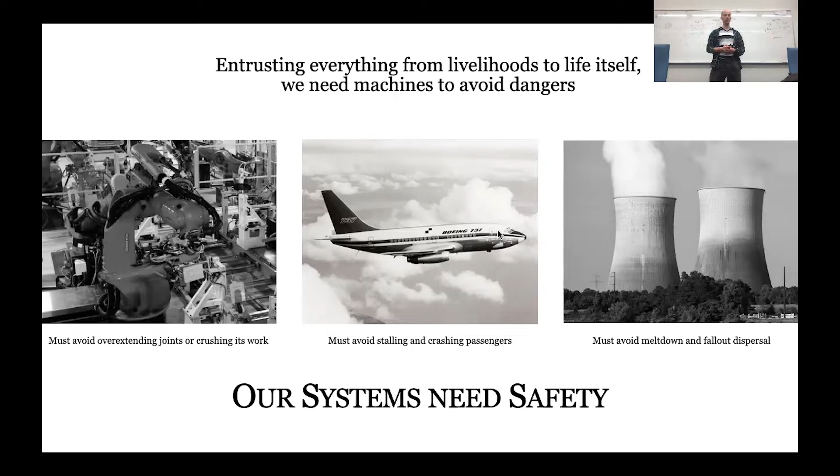These critical quantities are things that we track dynamically as dynamic states and form the foundation of control theory. With advances in safe control, like the work that we do here in Cory's third floor, we're able to robustly prove that our systems can remain safe despite perturbations or misspecification within a certain family.

Just to give one concrete example that will turn up often in this talk, we can analyze which states can reach a certain dangerous keep-out state. In fact, we are checking to see which states are upstream of that danger. We literally use the same partial differential equations for fluid flow and get viscosity solutions just the same to analyze which states are at risk of careening into disaster.

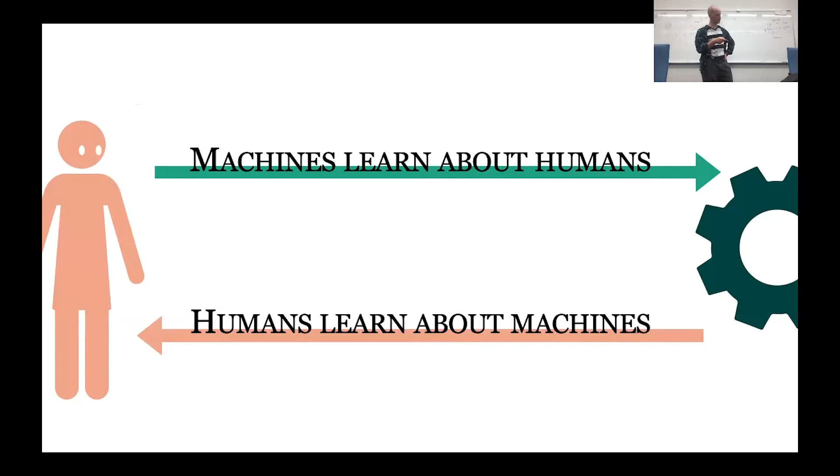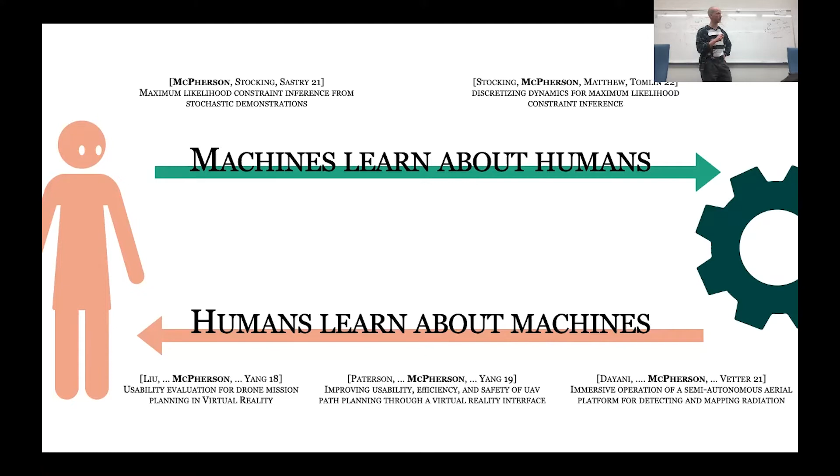I've had the pleasure of getting to research and publish papers on both of these arrows. But the research I would like to share with you today actually occupies a space between, where it works with both the green arrow and the pink arrow by first learning a model of human perception. We're able to use that model to generate behavior that helps them perceive and learn correctly, thereby completing a full loop.

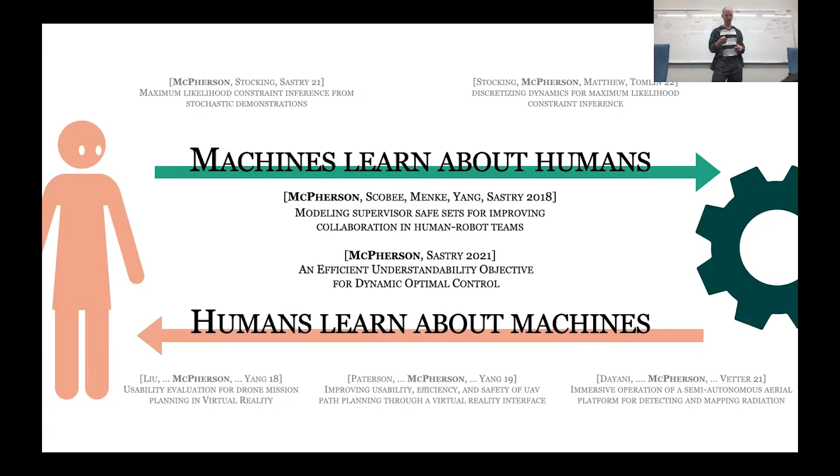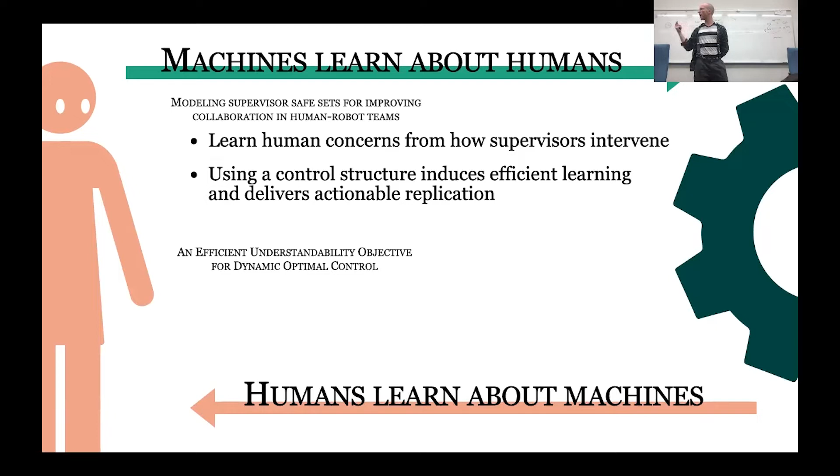So today's talk is going to be structured into two parts corresponding to these two projects. In the first, we'll emphasize the green arrow, using machine learning to model human supervisory concerns, then do a very basic way of adapting robot controls to conform to the supervisor's concerns, like designing a glove to fit a hand. In the second part, we'll focus more on the pink arrow, preferring a simple model of how humans perceive and judge, but emphasizing how we can proactively optimize controls to communicate safety.

So let's dive right in. To set the scene, it's pertinent to know that there have been great strides in not just machine learning, but particularly learning from human demonstrations. When a human acts and shows how to move through a scene, we can learn from their expertise.

For us safety folks, we can do something similar to learn how experts move around dangers and how humans consider risks, including some of my own research, which you can read about in the earlier chapters of my thesis that are not being presented today. But all of these methods work from how experts themselves move through a scene in order to avoid safety issues.

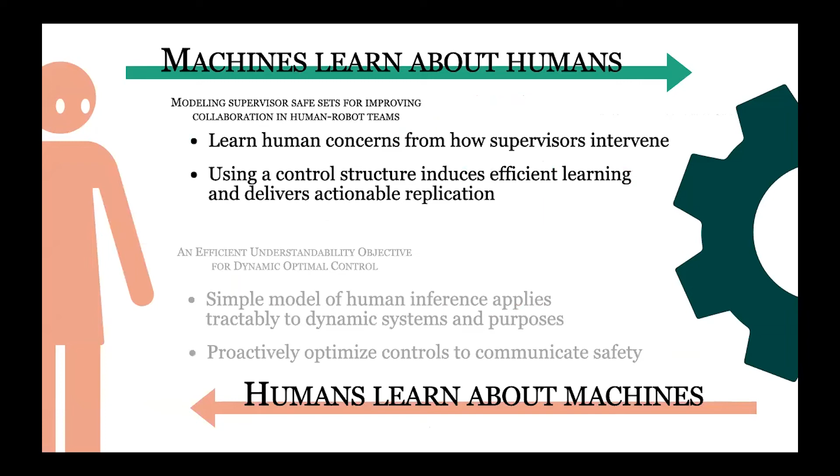So in this section, we were able to learn human concerns, particularly how they forecast danger. We used reachable sets as mathematical structure, as an inductive bias, to induce efficient learning, and deliver very concrete, actionable advice on just how to replicate human alarm and human concern.

Each of these points also opens up potentials for future research that I'm quite excited about. The first is that the data efficiency means we could learn a safe set for each individual human. But it's worth asking, is it necessary to learn a safe set for each human, or is there a one-size-fits-all of supervisor concerns?

My conjecture is that people with more anxiety who want the vehicles to turn earlier, or people with attention deficits, might see effects where when the number of robots drives up, the ability to intervene drops. So it's worth asking how neurodiversity plays into human-robot collaboration, and how we can help our systems work for all people or for a variety of neurotypes.

This second point is more of a philosophical exhortation, which is that this research, by using tools from formal verification, is not the first of its kind, but it's another example of how we can model human intelligence with something other than the econometrics maximum profit model, which is so much in vogue for a lot of artificial intelligence type stuff.

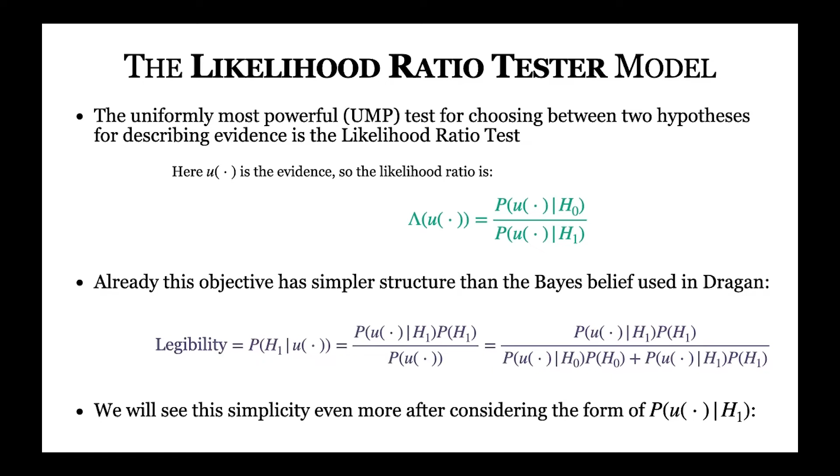this distribution of U's given intents. So let's dive into that. This econometrics derived model, the random utility model, distributes the probability of chosen control trajectories based off of how costly they are. The more costly they are, the more unlikely. And then you have to normalize this. And if you just abstract that away into the Z, this seems not too bad.

You have to integrate this exponential over all possible controls, which for continuous time is literally an infinite dimensional space. That sum will be a bit difficult to pull off.

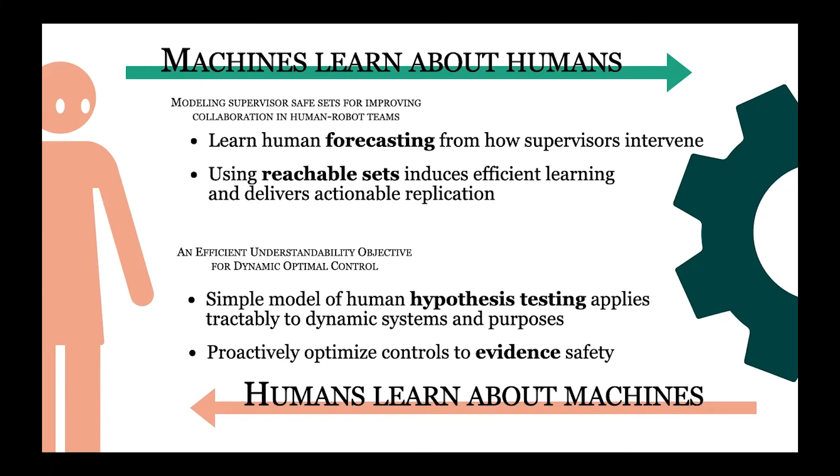Take a step back and look at the bigger picture. We now have two different illustrations of how machines can first learn about humans through a simple cognitive model, and then use that understanding to help humans learn about machines. I'd like to conjecture that once humans understand more about machine safety and unsafety, they can improve the data they're providing to the machines. And then we can have humans help machines learn about humans.

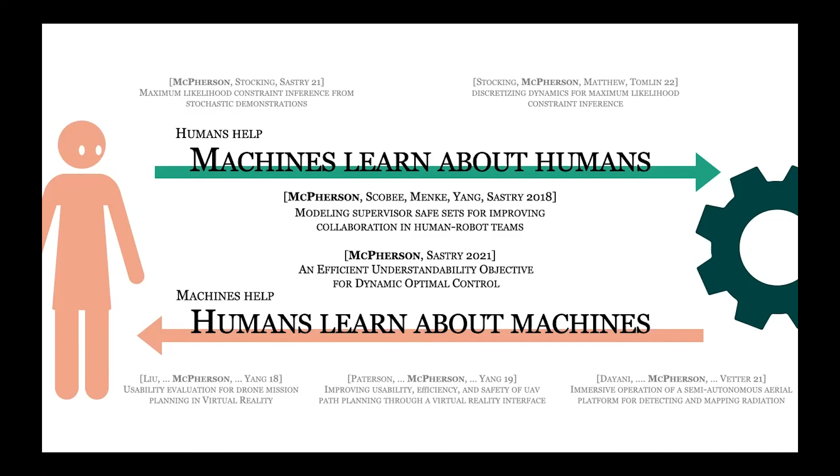This forms a virtuous cycle where more understanding of humans provides more understanding of machines, provides more understanding of humans, ad infinitum. In control theory, we call this a positive feedback loop, which will blow up to infinity. For states we want to keep stable, that's bad. But for mutual learning, which is a strict positive, I don't mind if that increases to infinity. So let's create a feedback loop of human learning and mutual understanding.

This mutual understanding is not only going to be vital to the people behind the wheel who have to save otherwise opaque systems from certain death, but it will also be handy to all humans who have to collaborate side by side with these machines.

Continuing with the road example, we see that in our current rollout of self-driving cars as they hit the streets, most accidents are actually caused by what should be safe behaviors—not charging through stoplights, but instead hitting the brakes. These safe stops are too opaque to be safe. It causes other road users to rear end or sideswipe our machines.

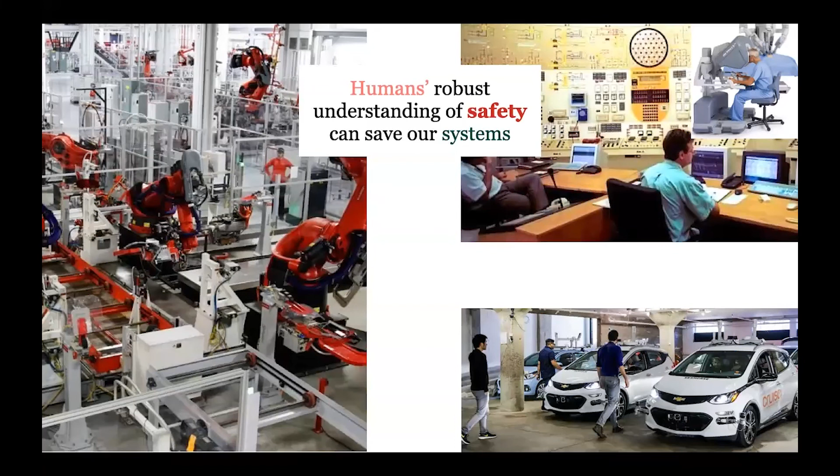So we see that transparent safety is vital not only to safety supervisors, as we've mainly been concerned with, but also to the entire populace and society of humans who have to collaborate with our machines. As our machines are becoming increasingly not just reportees to humans, but side-by-side collaborators in our streets, in our factories, and even in our hospitals.

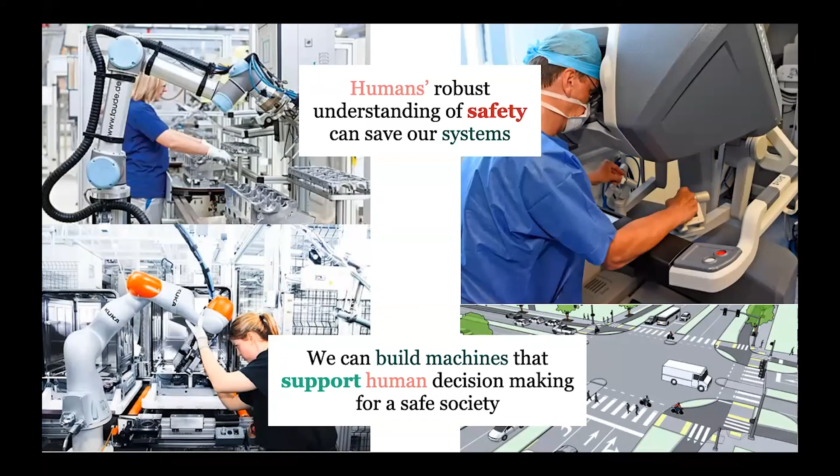I hope that this research has convinced you that we can build machines that proactively support human decision-making, and a diverse set of human decision-making, through detailed models. And that will create a safer society. Thank you for your attention. Let's make that feedback loop of mutual understanding. Thank you.

Thank you to all of the wonderful community here at Berkeley that made this happen—to all the people on the third floor who work on safety, or human and robots together, or just building wild biomimetic systems, getting to eat with you and learn from you, and even just heckle AlphaGo as it makes its debut, or learn that you can assemble a camera tripod out of sticks. You all have taught me how to wonder and ask questions boldly and with a vengeance.

Not just the third floor office mates, but also the broader CITRIS People and Robots initiative. I had the good fortune of organizing a graduate roundtable with awesome people like Katie Driggs Campbell and Michael Laskey. With that community, I got to meet people I would never have overlapped with otherwise, like Megan Clark, and old what's-his-face—it's Alan Baum, maybe for the crowd. If Alan's not here, that joke will fall flat. I like it, I think it's funny. Anyway, also people like Megan Clark and Alan Baum—big thanks to them for broadening my horizons.